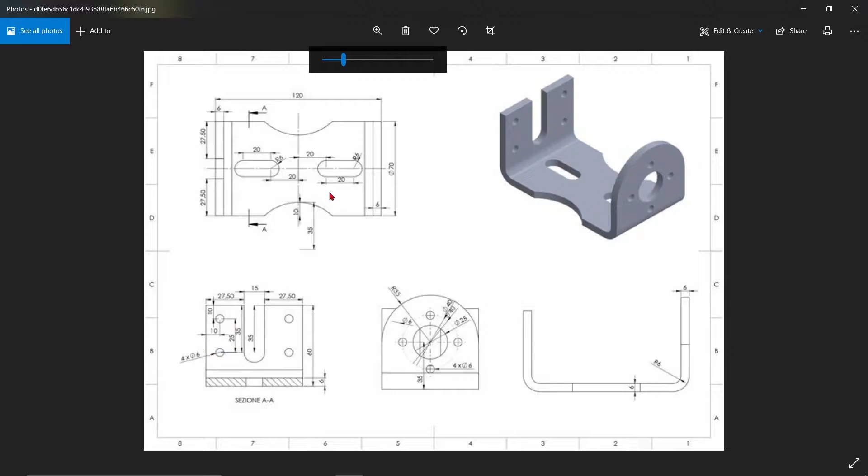First, open SolidWorks, go to File, select Part, and click OK. Then select the sheet metal. In the menu bar, just select base flange, select the plane, then make one rectangle.

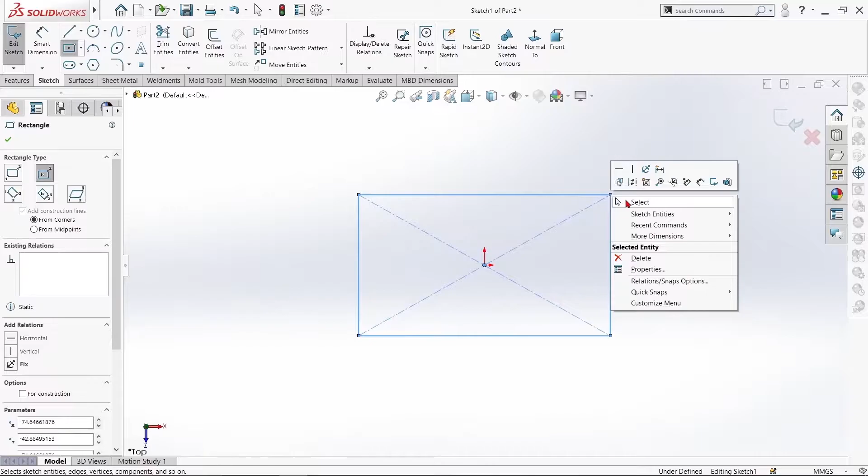Then we have to set the dimension for the rectangle. Length and breadth should be 96 and 70. Then exit sketch. Thickness should be 6, so reverse direction. Then click OK. Now we have to do edge flange.

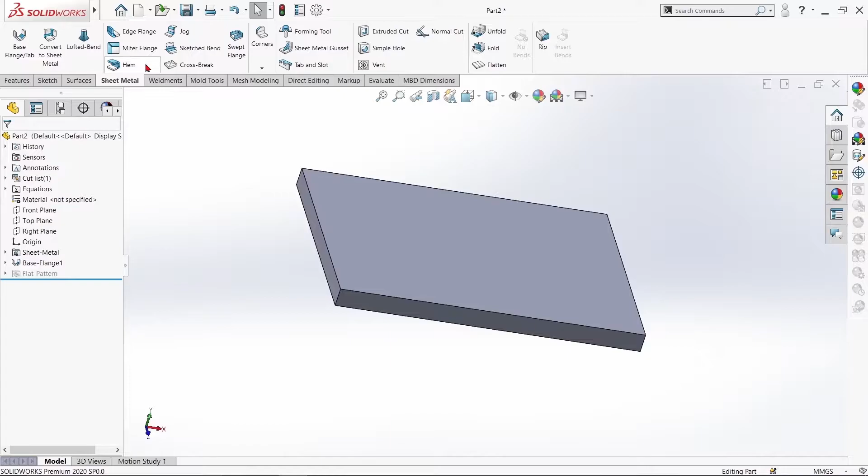For this sketch, just drag upwards to the y direction, x direction. The length should be 60, flange position will be centered, the bend radius should be 6. Then edit flange profile. Now normal to.

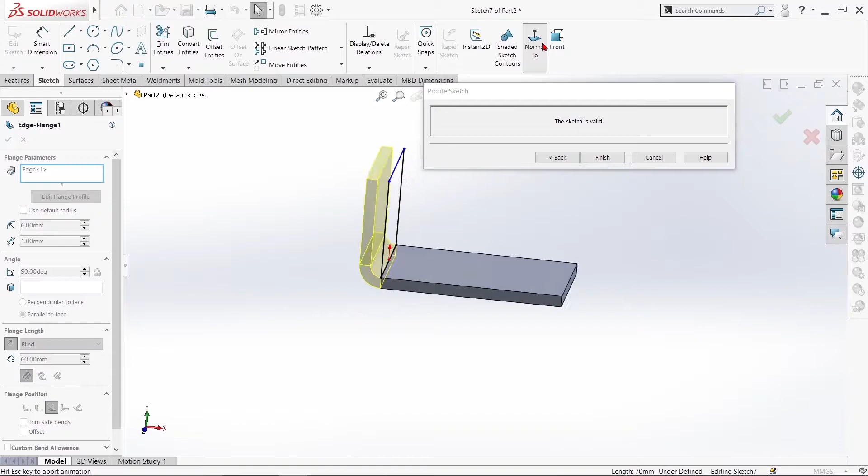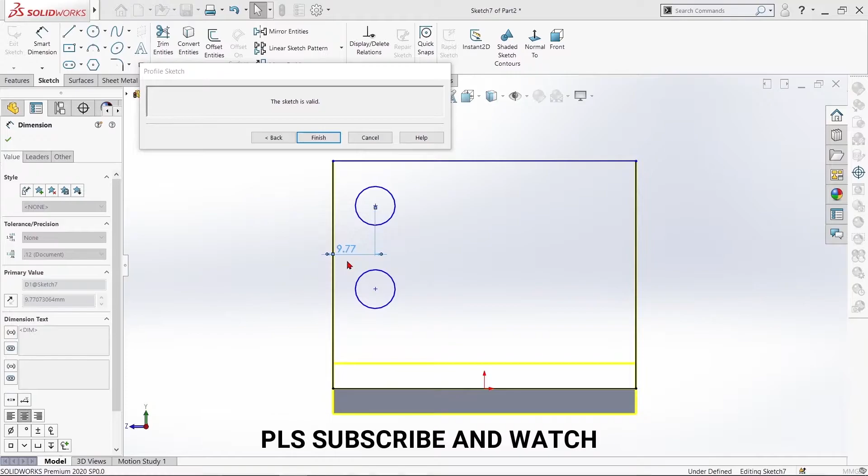Then make 2 circles on the sketch. Just select and hold control to equal the 2 circles. Then the length should be 10, this length should also be 10, the gap distance should be 25.

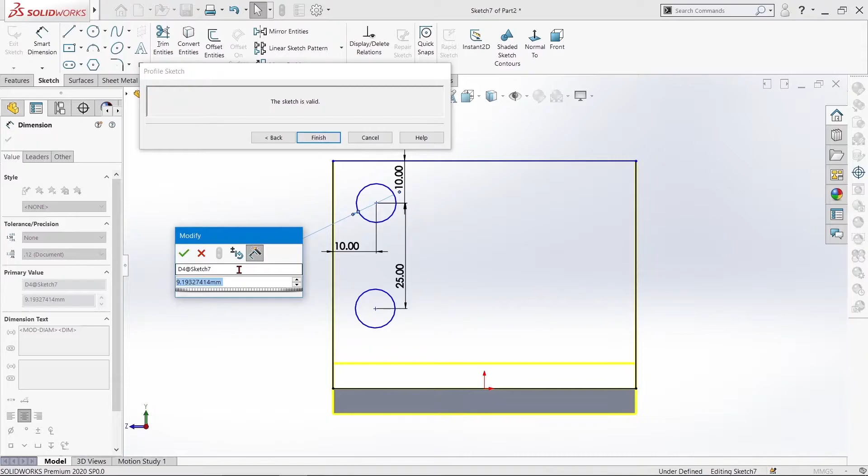The diameter will be 6 for the circle. Okay, fine. Now we have to add, hold control and select vertical. Then from the bottom to the circle, 25. Now the sketch is fully defined.

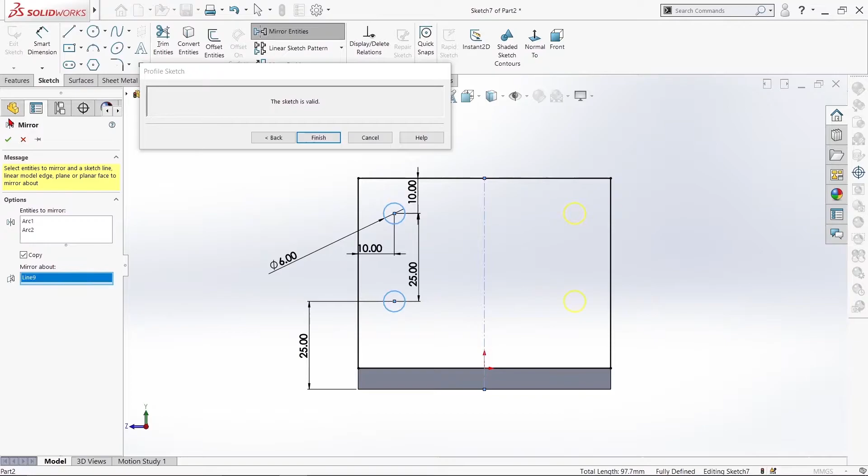Make one center line, then connect it to the center point. Select mirror entity, select the circle, mirror about the center line, then click OK. Now add one circle.

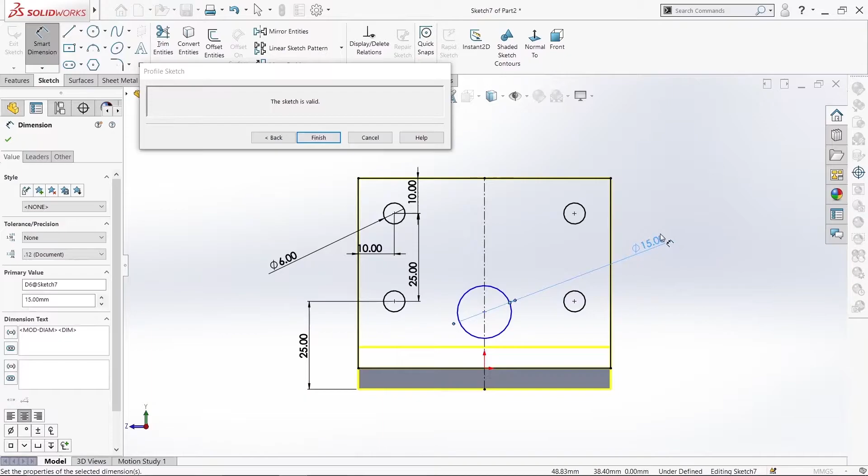The radius or diameter should be... 30 or 15, I don't think so. Okay, the diameter should be 15. The position from this point to the circle should be 35.

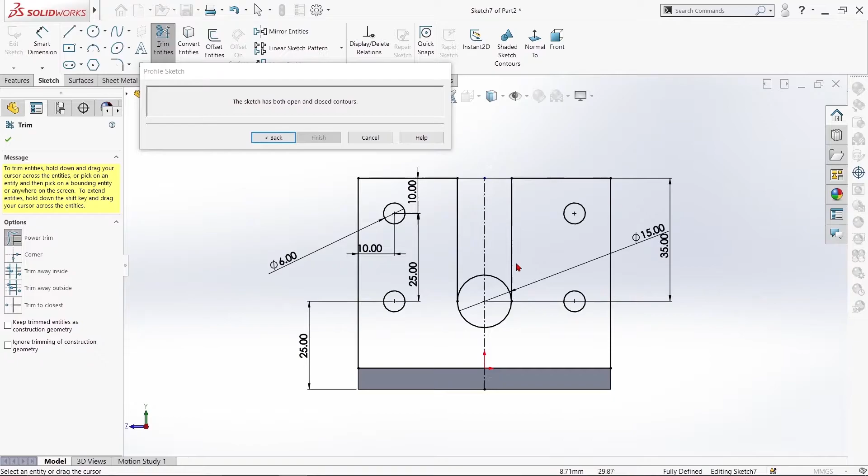Now we make 2 tangent lines on both sides of the circle. Then select trim entity, select the unwanted portions you don't want in the sketch, then click OK.

Now the sketch is valid. Just give finish sketch. Now one side will be done. Now we have to do the other side also.

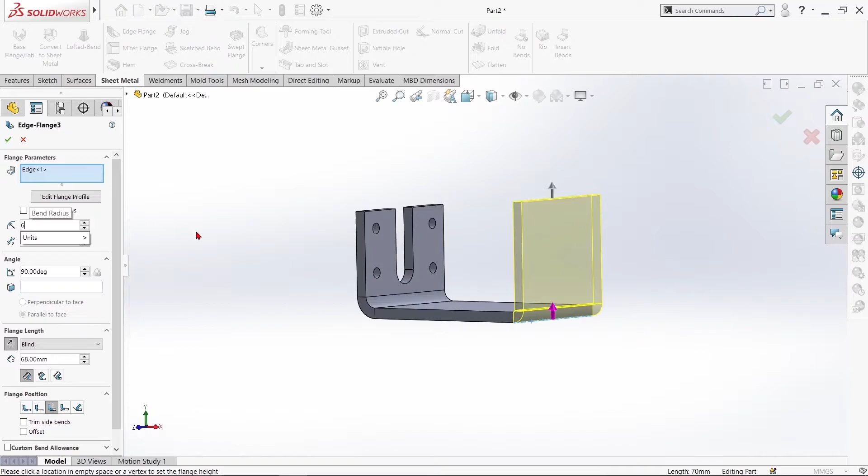Same default radius should be 6. Select the centered option, edit flange profile, normal to.

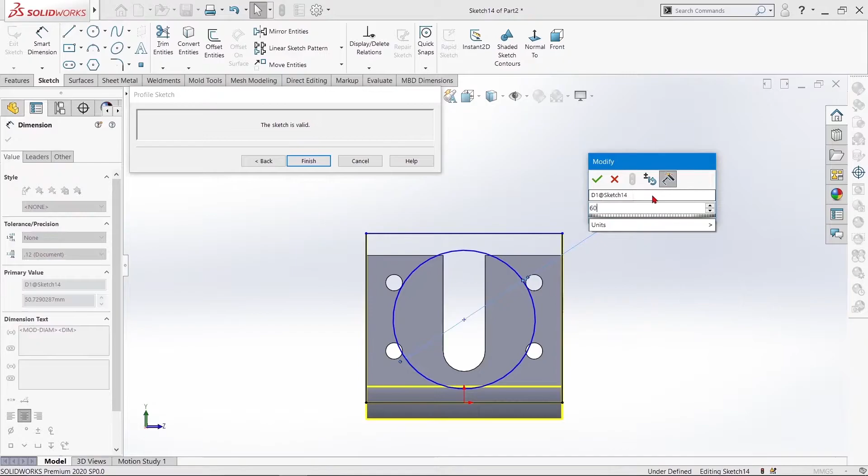Now we have to make one circle. The circle diameter should be 70, 60 or 70. Then from the bottom point to the center point, the distance is 35. Then click OK. Now hold control and select vertical.

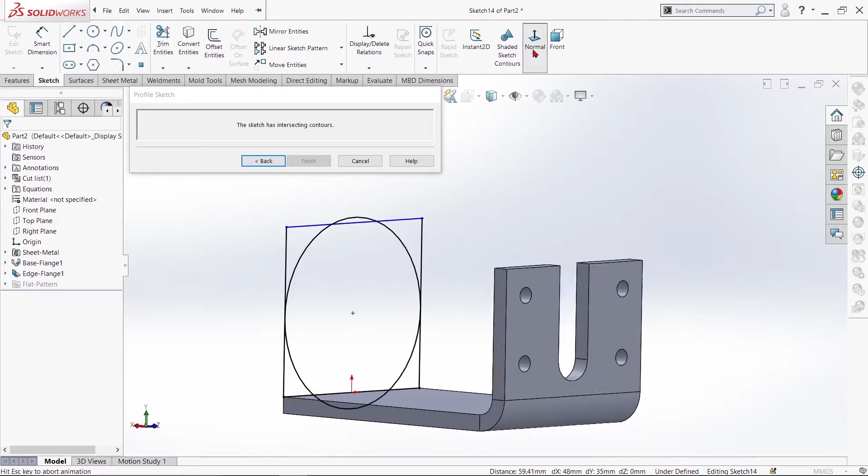Hold control, select both points, then do vertical, and it will work. Now we have trim entities, select the... something, okay, just give height. Oh, this was the error we made.

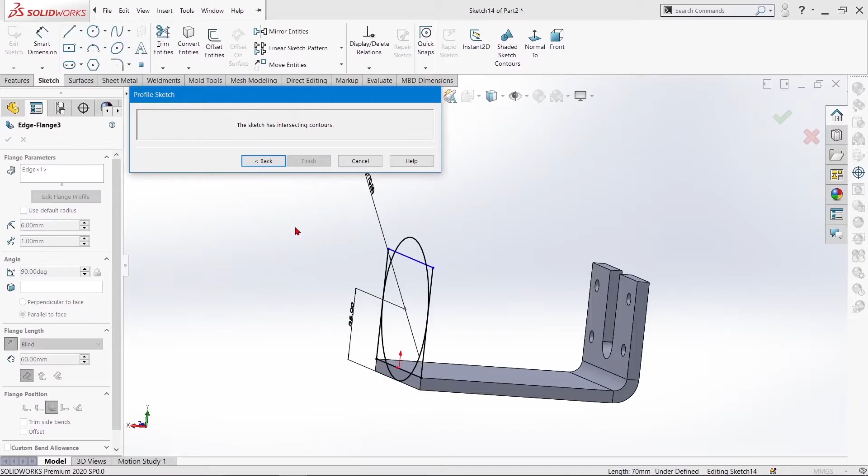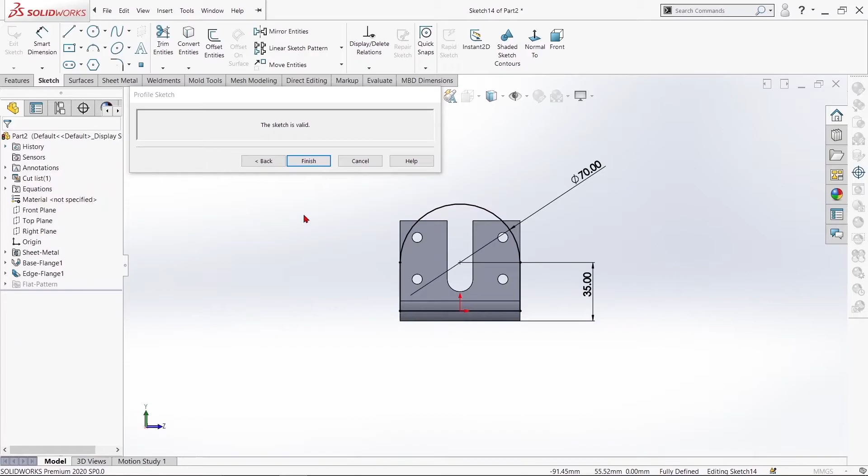Just edit flange profile, normal to. Now we have to trim, we don't want this, also we don't want this, and this also. Okay, the sketch is valid. Now it will be fine. Just give finish. So the opposite side is also 50% done.

Now we have to make the small cutout. Select the center point, make one circle for construction, then click OK. Then the diameter should be 40.

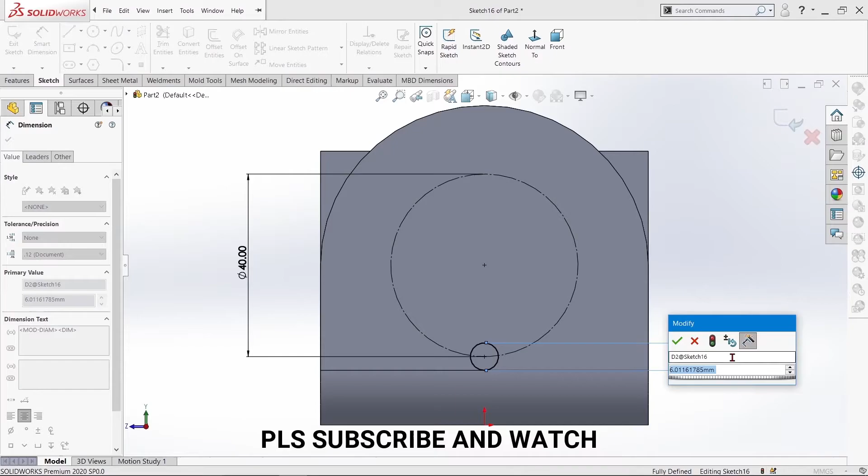Select, drag the center point to the circle center point, now click OK. Hold control and select both center points, then give horizontal. Same process for vertical, and click OK.

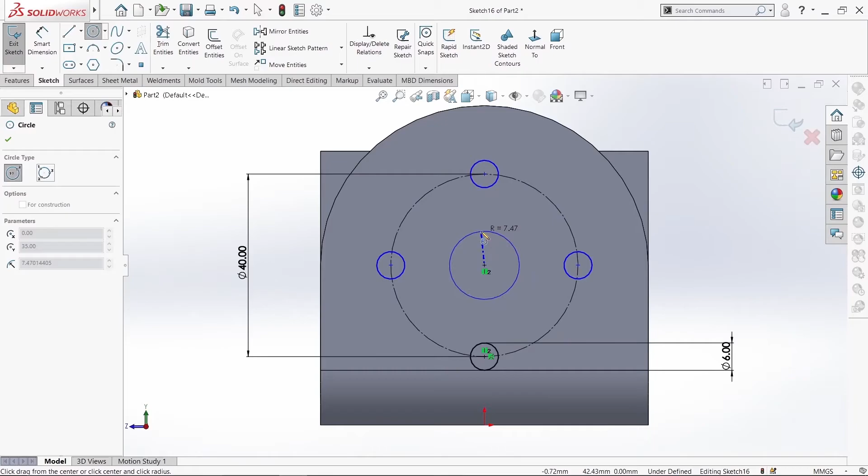And draw one circle, the diameter should be 25. Then give OK. Okay, that's also horizontal, that's also horizontal. Just give fully defined sketch, drag, then calculate. Now the sketch is fully defined.

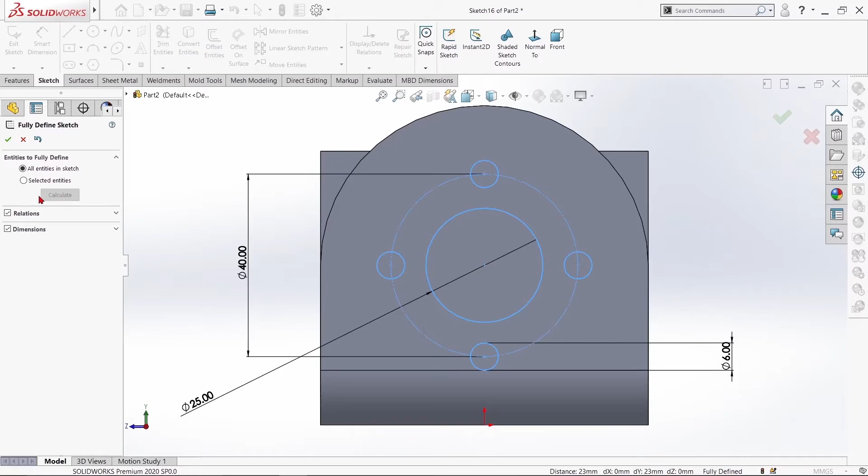Now we go to extrude cut in sheet metal. Select the sketch, now link to thickness, okay, then click OK. Now we have to do some changes in the center portion.

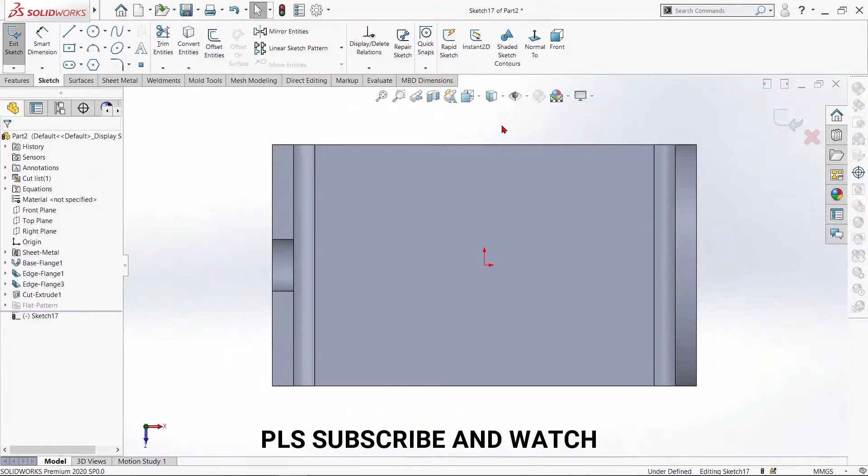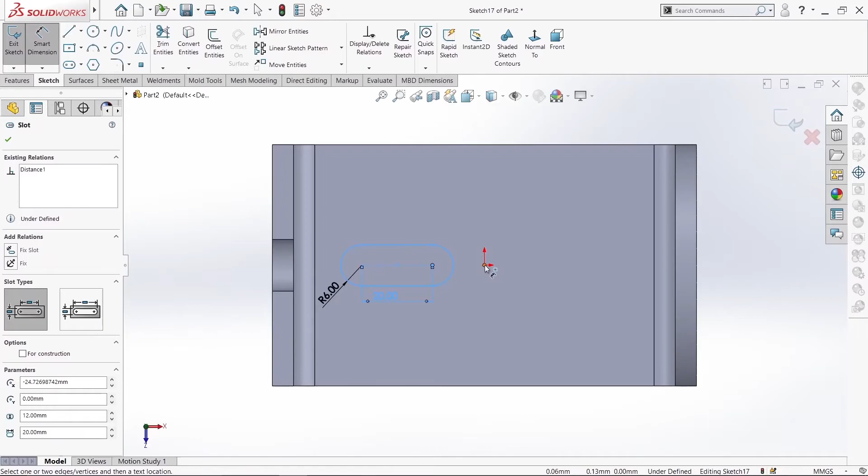Now we have to take center slot, then give dimension. Total length should be 20, radius should be 6, length from this point to this point 15, 20. So okay, the length should be 20, then click OK.

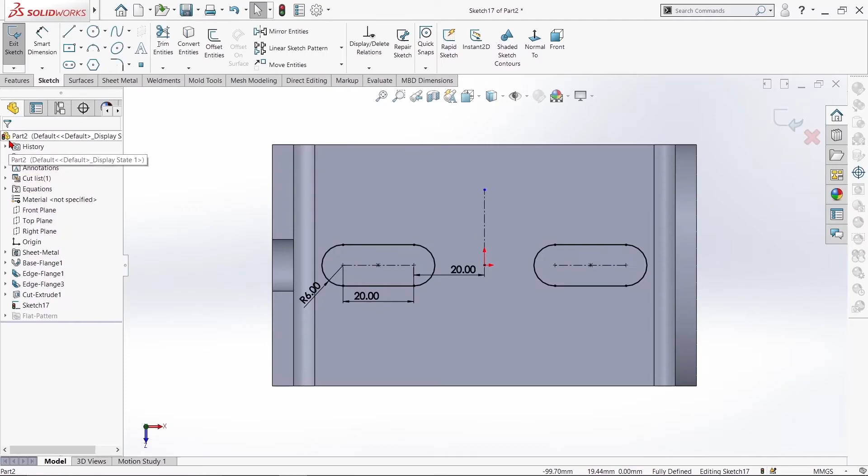Now we have to make one center line to do mirror. Draw one center line to mirror this object. Just select, drag and select, then select the center line, then click OK. Now make extrude cut, okay, then click OK.

Now we also have to do one extrude cut in the center part. Take 3-point arc, then just draw over it. Now make one center line from this point to this center point. Now select the line and make it vertical.

Then hold shift and drag, this length should be 35. Select this point, hold shift, then drag over it, this length should be 10. Now click OK.

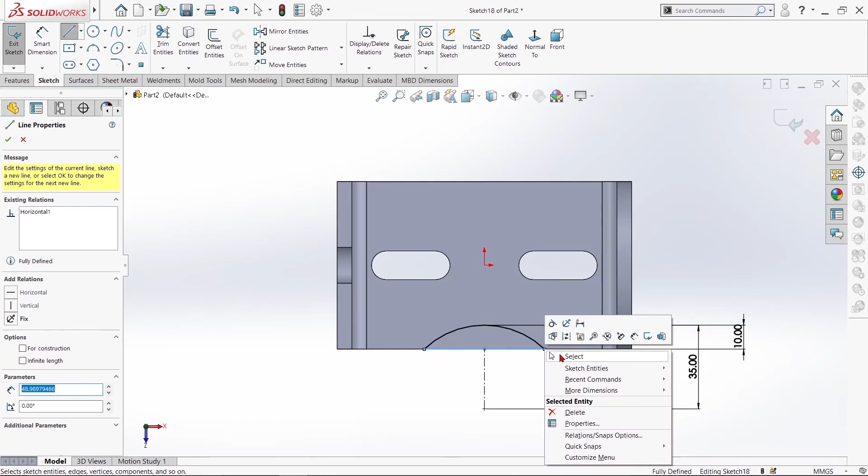Now fulfill the sketch using the line. Now go to sheet metal, same extrude cut, then click OK.

Mirror face is, I think, right plane. Front plane, then click OK. Now the sheet metal should be finished.

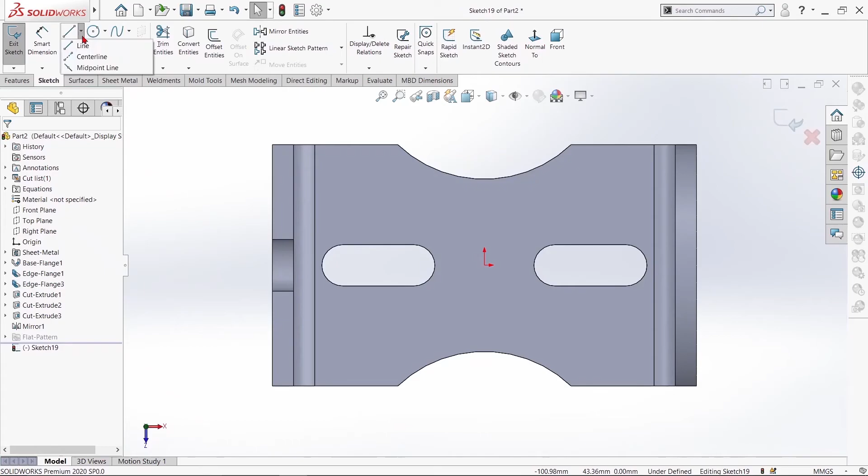Now we will check the total distance. This will be 12, this will be 96, then this will be 12. This length should also be 12. Because we gave 96 for the rectangle, the total length should be 120.

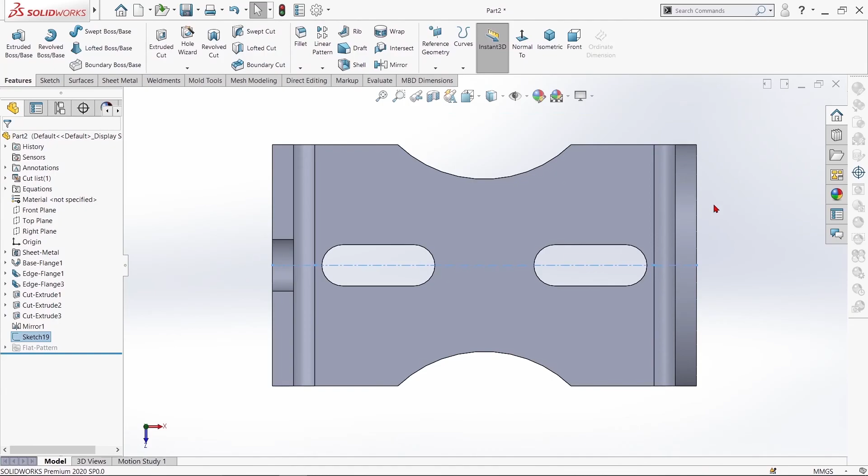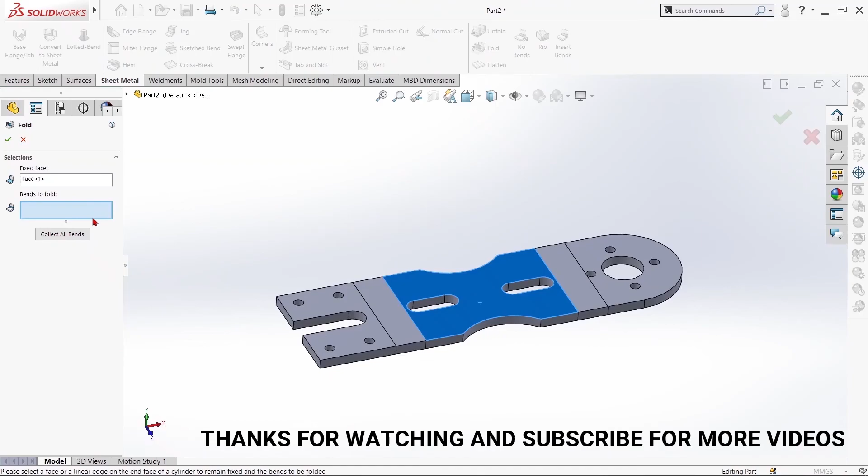Okay, then we don't want this sketch, just delete it. Then just unfold, select the fixed face, collect all bends, click OK. Now, fine. Now we have to fold, just select collect all bends, click OK. So this is the sheet metal exercise.